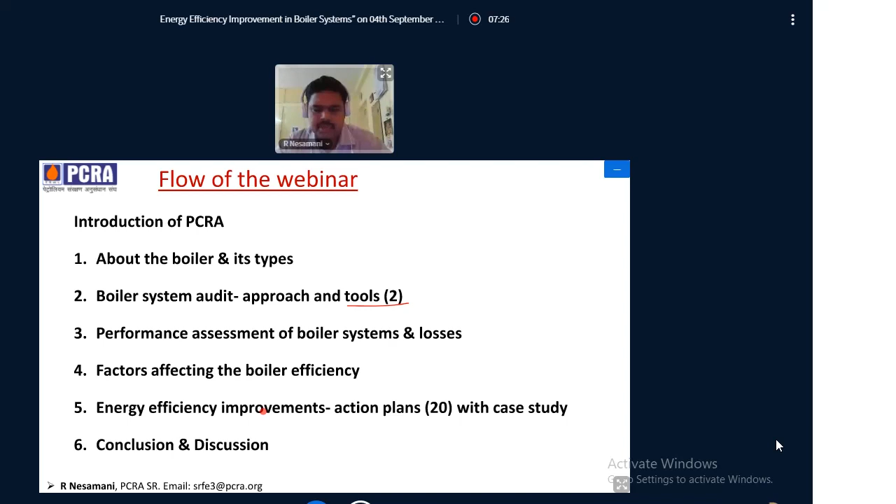Introduction about PCRA: our vision is to become a center of excellence for energy conservation. Actions towards achieving our vision include conducting trainings for industries on energy conservation techniques, and conducting energy audits for industries at all levels, starting from PAT audits for designated consumers to MSME audits. We have conducted more than 10,000 energy audits till date.

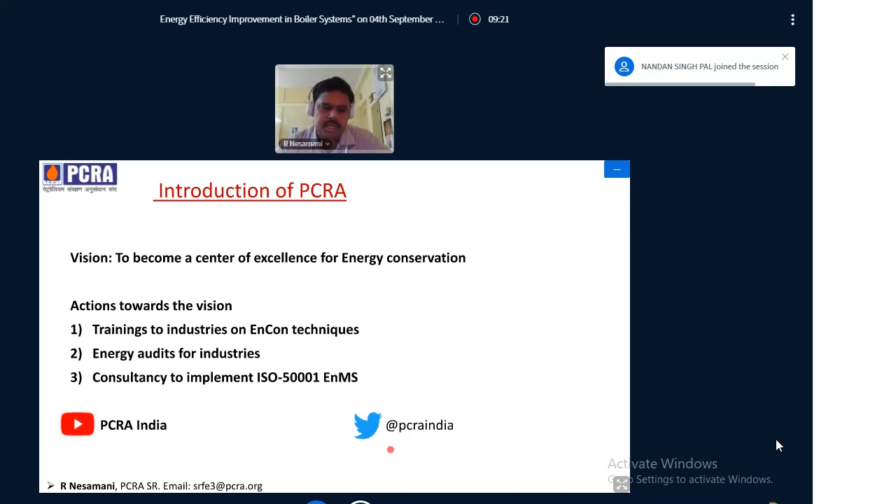We provide consultancy to implement energy management system ISO 50001 for industries to keep continual improvement in energy performance. This is our YouTube link for PCRA India, and this is our Twitter handle. If you follow our YouTube and Twitter, you will continuously get updates about energy conservation.

So first, we'll move on to a small introduction about the boiler. A boiler is a pressurized vessel which converts water into steam using heat energy by burning a fuel. We give fuel and air through a burner, and because of its combustion, it produces heat energy. That heat energy is absorbed by the water, and the water gets converted into steam. This is a simple and brief introduction about the boiler.

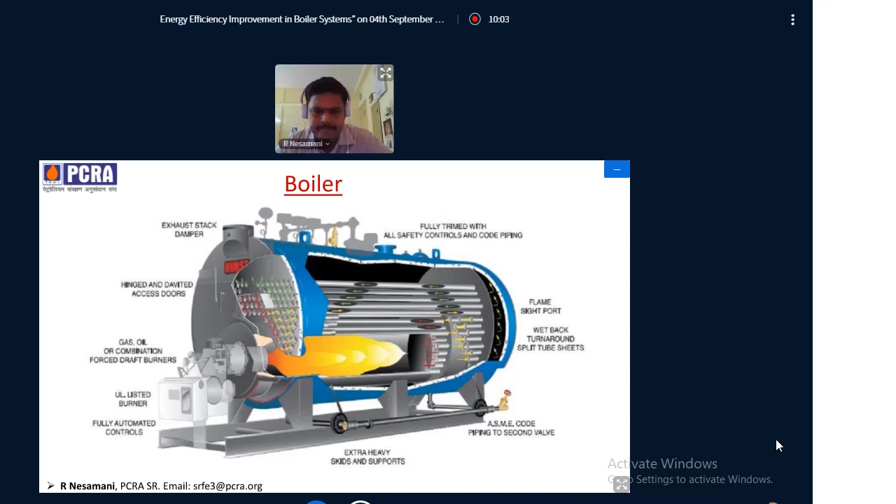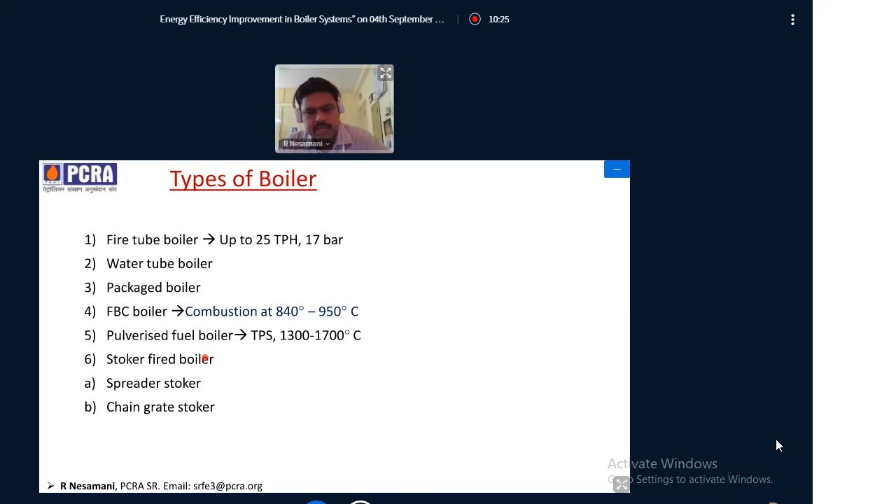Types of boiler: we have various types of boiler as per its pressure and applications. We have many types like fire tube boiler and water tube boiler, packaged boiler, FBC, and pulverized fuel boiler, which is mostly used in thermal power plants at high temperatures. And stoker fired boiler has two types: spreader stoker and chain grate stoker.

So the second topic is how to do an energy audit of a boiler system. What is the approach, and what are the tools we will be using during the audit?

The audit approach is like this: first thing, if you go to any industry, we have to calculate the thermal baseline for the plant or industry, meaning in terms of specific energy consumption - how much thermal energy they are using to produce one metric ton of the product output. That we have to calculate and find, so that will be our baseline specific energy consumption.

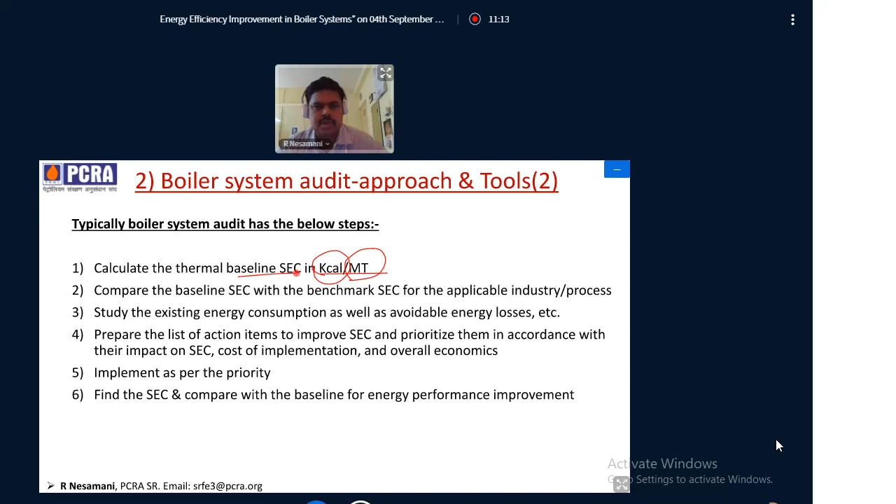After that, we have to compare that baseline with the benchmark baseline for the applicable industry or process wise. For example, let's take a rice mill - there may be some 1,000 kilocalories per metric ton of rice product. So we have to compare that with other industries, so we can know what is our status, whether we are lagging or if there is any scope of improvement. That we have to find out.

Third, we have to study the existing energy consumption pattern, to find the avoidable energy losses in the boiler and steam systems. Fourth, as per the findings, we have to list down the action plans to improve the SEC.

We have to prioritize them as per the impact on SEC and the cost of implementation, economics, and overall economics also, with the payback period. As per the priority and economics, we have to implement the action plans one by one.

The final step is, after implementing, surely the specific energy consumption will come down. So we have to find SEC again and compare with the initial baseline, so that will show how much improvement we have achieved in energy performance. So this is the approach we will be using for energy audit of a thermal system.

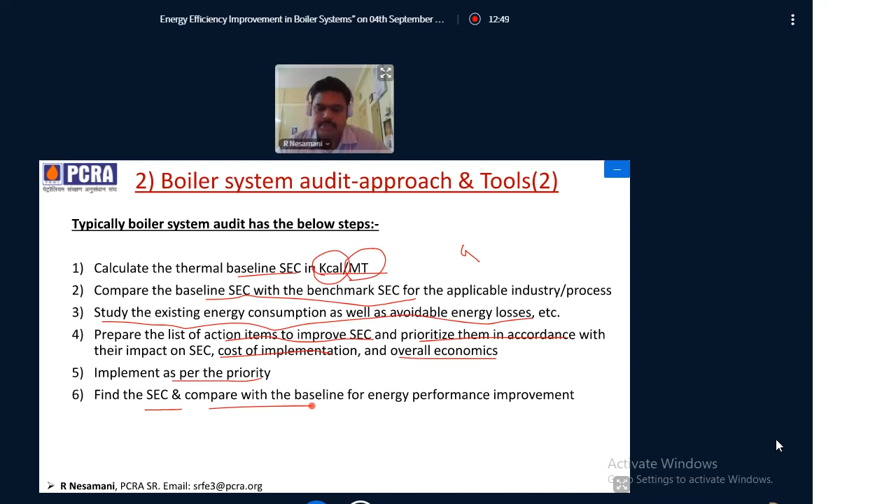So for tools, I have told that we will be using two tools. One is a steam balance diagram. Whenever we go to any industry for a boiler and steam system audit, we have to draw a single line diagram of the steam, showing how the steam flows through various processes, and what are the pressures and temperatures. This will give a fair idea about which process consumes more energy.

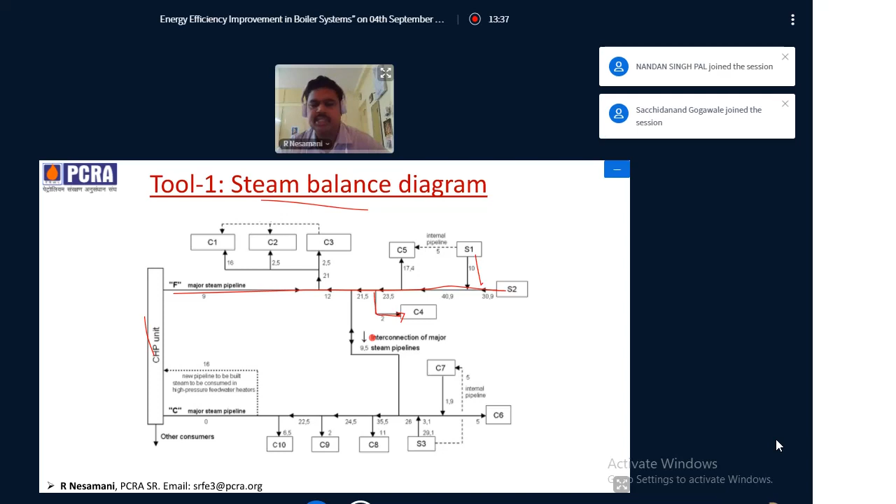Meaning, the required temperature and pressure may be lesser, but we may be supplying steam at high pressure and temperature. Those things, and leakages - those things we can approximately find out.

The second tool is analyzing the energy basket of the unit. Whenever we go to an industry, we have to find what are the various energy forms they are using. One is the electricity they will be using - and this example is from a rice mill cluster - they have been using rice husk for boiler fuel, and the third is diesel.

When we asked the industry person what is your energy consumption, she just replied that we have been consuming electricity of this much units per month, and asked us to do something so our energy bill reduces. So the point to note is that most small industries think thermal energy is not important, or significant, as it is not metered in small units. They are not aware that it's also one of the energy forms they are consuming, and losing.

So when we prepared an energy mix basket for the rice mill, we found that the electricity which they consider their main energy consumption is only 6.5% of the total energy consumption. The rice husk, meaning boiler fuel, consumption is almost 93%, but electricity consumption is only 6.5% of the total energy mix per year.

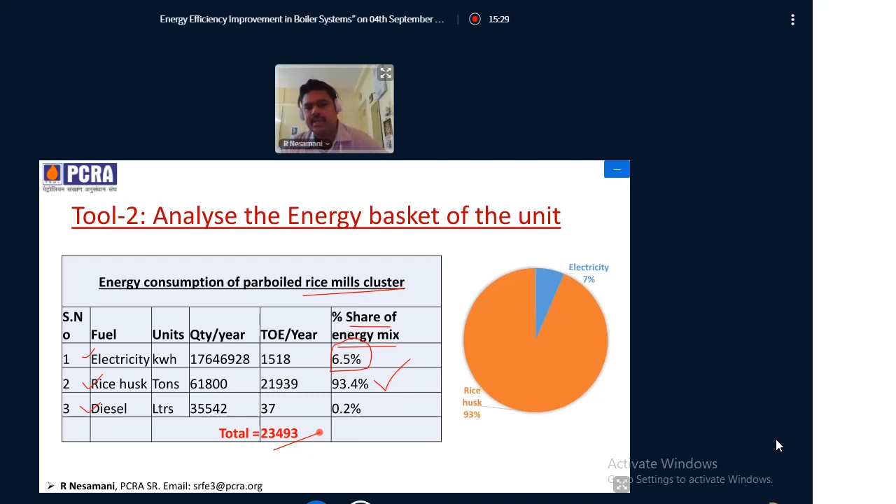So this shows the importance of giving priority to the reduction of thermal energy instead of focusing only on electrical energy. That's what needs to be noted.

So next is the energy balance diagram of the boiler. If fuel energy input is in the form of fuel, maybe rice husk, coal, wood, anything, it is 100%. It enters the boiler. The boiler will have losses, like dry flue gas loss will be maximum, then radiation and convection loss and the blow down loss. These losses will be there. After that, the boiler efficiency will come between 70 to 80%.

This 80% of input energy is given in the form of steam. That is the output of the boiler. That steam enters the end use, for process usage. During that usage also, we lose steam in the form of distribution system, which we will discuss in detail. Almost 5 to 15% is lost in distribution. So finally, the end use load will get only 56 to 75%.

The energy manager of the plant, his main concern shall be to improve the overall efficiency so that the fuel cost, consumption cost should come down, and specific energy consumption should come down.

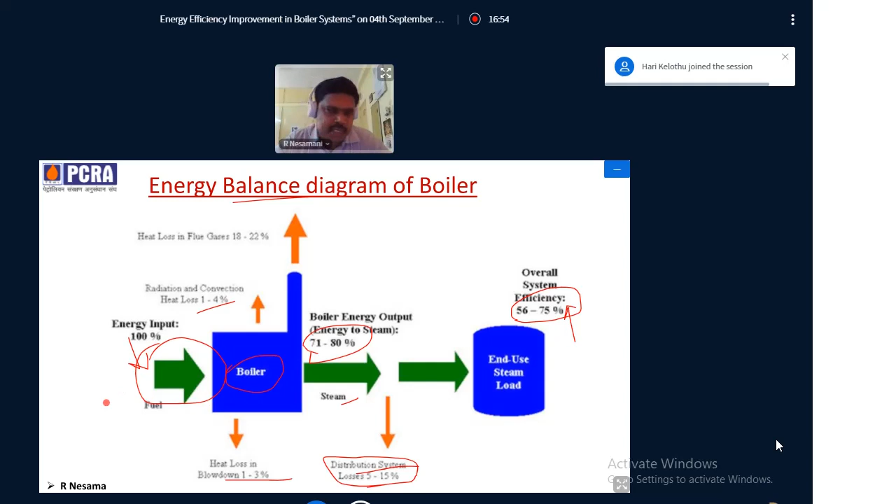So this is the boiler's combustion chemistry. What happens inside the boiler? We supply fuel and air inside the furnace using a burner, and both mix together because of 3 T's. We need 3 T's: time, turbulence, and temperature.

Because of the combustion process, the byproduct is wasted as flue gas. It comes out as CO2, nitrogen, water vapor, oxygen, and carbon monoxide. It shall be in very little amount, but anyway it will come out. And some fuel will be lost as unburned.

So two important reactions are happening. One is carbon combined with oxygen to form carbon monoxide, if there is a lack of oxygen, which releases only about 4000 BTU per pound of energy. If it is proper combustion, carbon mixes with oxygen to form CO2, releasing energy of 14,000 BTU. So you see that because of lack of combustion, we lose almost 10,000 BTU per pound of fuel.

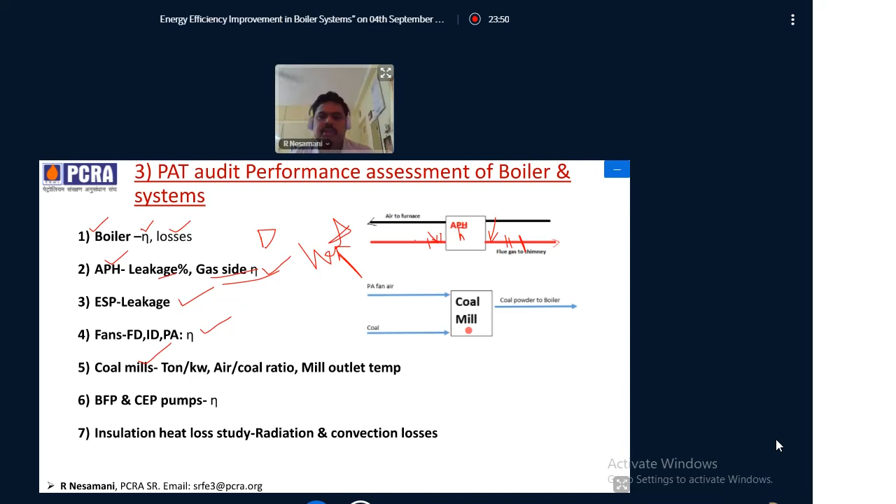Fifth is coal mill. For coal mills, we have to find - this is a coal mill. Air is supplied to coal mill to carry the coal powder. The coal is supplied to coal mill, crushed in the coal mill so that the coal powder goes to the boiler. This is the process of coal mill. What we have to find is how much ton per unit of energy consumption, that we have to find out.

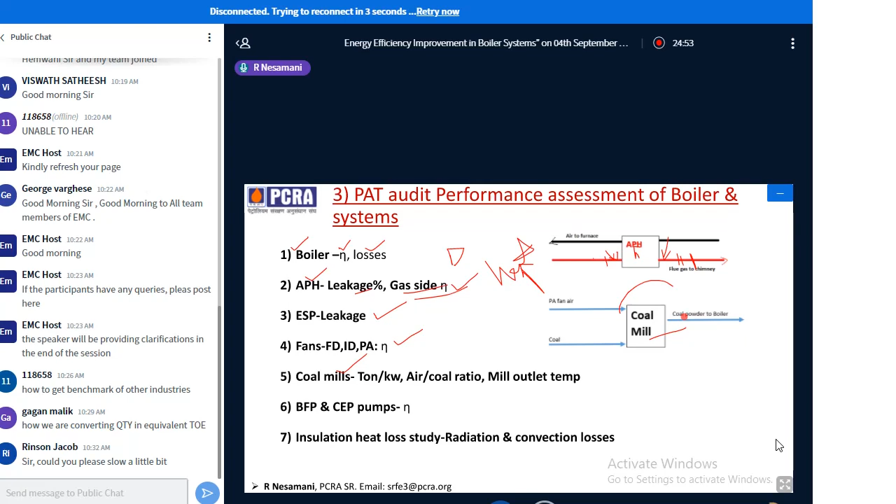Direct method is output divided by input. Input is given in the form of fuel, so mass flow rate multiplied by GCV will give input to the boiler. And the output is steam - steam's enthalpy minus enthalpy of the feed water will give the output. So this will give the efficiency of the boiler unit.

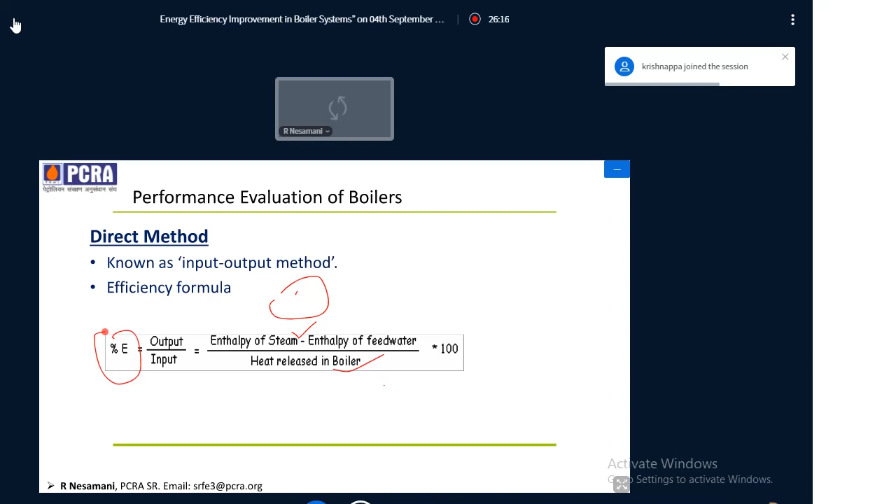But the problem with this method is even a small error in any measurement will end up with a high deviation in efficiency calculation. Because of that, we don't use this direct method. We normally use, as per the standard PTC 4.0, it is mandated to use an indirect method, that is a heat loss method. We'll see that.

This is for a boiler, fuel and air given as input, and flue gas going out to chimney. What are the losses? One is dry flue gas loss, and hydrogen loss, moisture in fuel loss, and moisture in air loss. This is because hydrogen combines with oxygen to form water. That water, as well as the moisture in fuel and moisture in air, will get heat of combustion from inside the boiler and get converted to water vapor, so it consumes energy from the furnace, absorbing energy and wasting useful heat.

And the fifth loss is carbon monoxide loss. This is because of the lack of oxygen.

Seventh is fly ash loss and bottom ash loss - this is applicable for coal boilers. And surface loss, this is due to the skin temperature, boiler skin temperature, as well as insulation. And this is blow down loss - this also will be there for boilers.

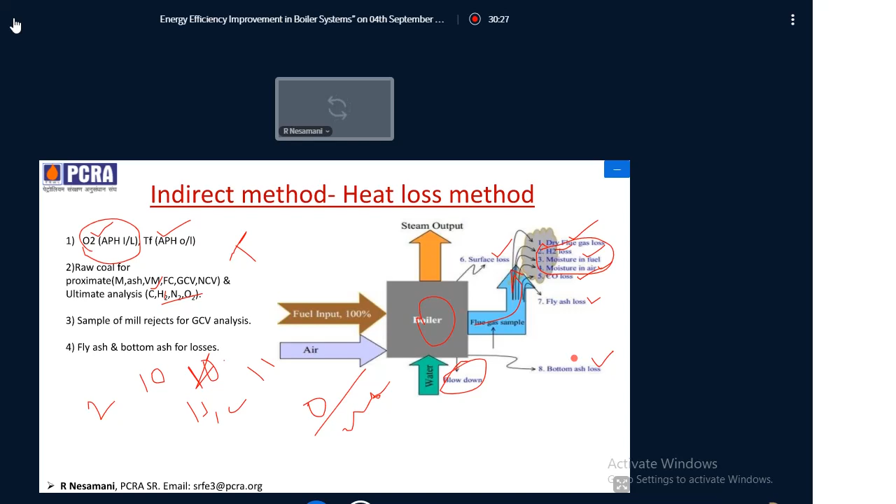These are the fly ash and bottom ash losses. We have to collect the sample and measure the GCV. Thereby we will find how much energy is lost in ash.

So one point of concern is, in flue gases, which data need to be taken, oxygen or CO2? Using CO2 also you can find the excess air, but it is preferable to take an oxygen reading. The reason is flue gas contains oxygen, CO2, carbon monoxide at very ppm level, and SO2. But if you see the correlation between oxygen and excess air, as the excess air increases, oxygen also increases proportionally.

But in case of CO2, as excess air increases, the CO2 reduces, not exactly proportionally, there's a little deviation. For example, for LDO, if excess air is increased from 2 to 10%, it causes O2 in flue gas to increase by a factor of 5, but the CO2 drops by only 10%. Because of that, it is preferable to use an O2 reading for finding excess air.

Also, oxygen percentage is less sensitive to variations in the chemical compounds of the fuel. But CO2 in the flue gases depends on the carbon percentage in the fuel, whereas O2 is not affected by the carbon content in the fuel. Because of these reasons, we prefer to take an oxygen reading to find the excess air.

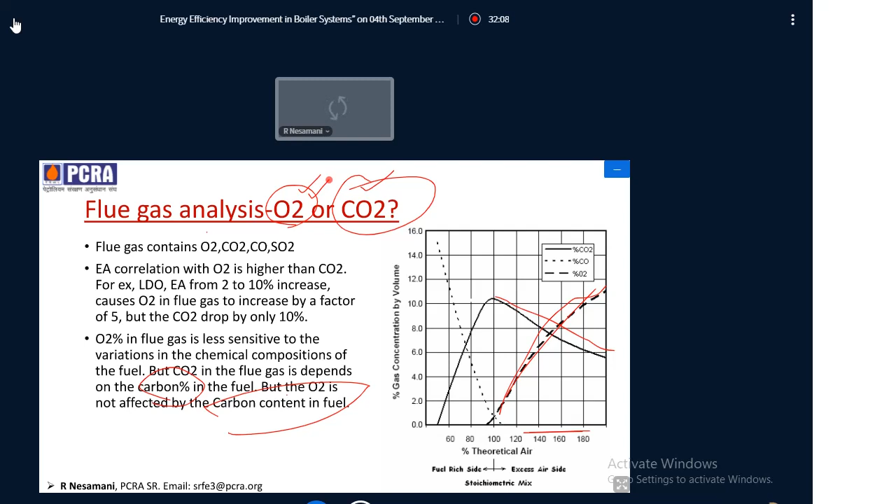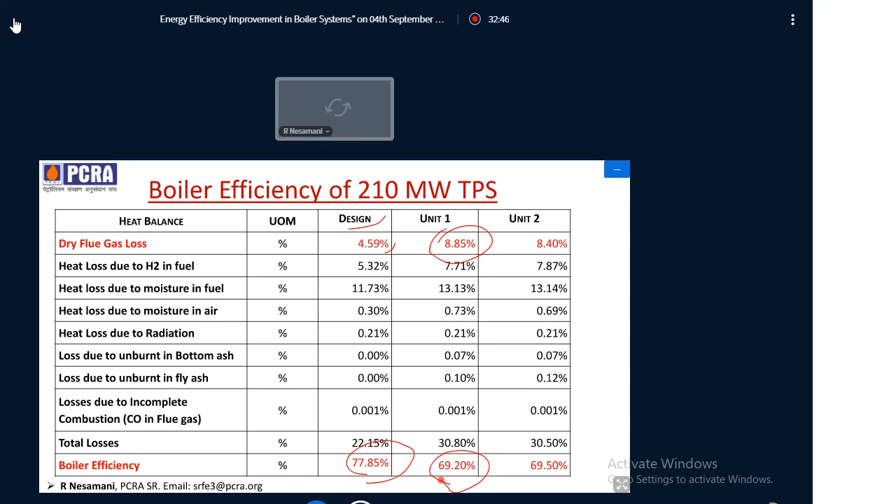So we'll discuss the losses in detail. The first loss is the dry flue gas loss. The causes are high excess air and high flue gas temperature, meaning stack temperature.

First we have to find the theoretical air, that is the stoichiometric air. For example, for coal, 10.7 kg of air is required per 1 kg of fuel. It will vary as per the various types of coal, depending on the carbon and hydrogen content in the coal. But even if you supply this optimum air, is it enough?

No, it's not enough, because inside the furnace complete combustion cannot happen that way — each carbon particle will not mix exactly with an oxygen particle. So we need to supply a little bit of excess air so that complete combustion takes place.

So we have to find the optimum excess air levels for each fuel. For example, for coal, optimum excess air is 15 to 20%. So it means that if you supply almost 12 kg of air per 1 kg of fuel, it will result in very good combustion. So you see this drawing which we have discussed.

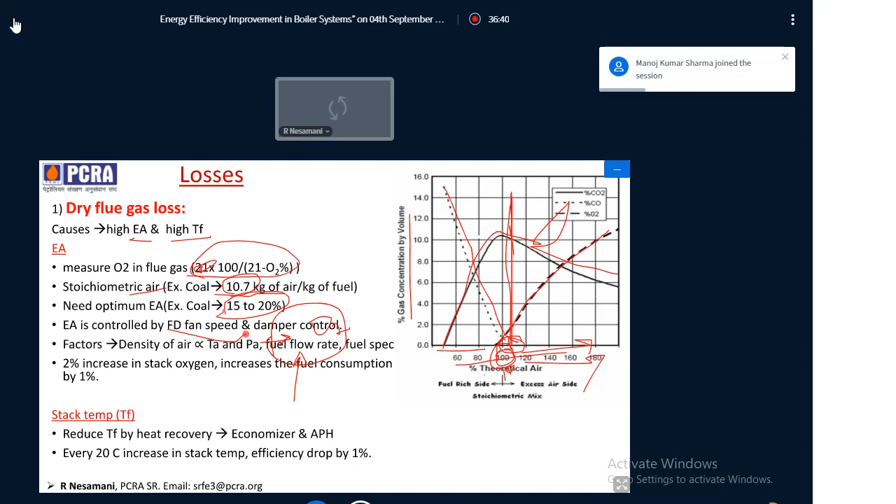If the excess air levels increase, it will carry temperature away from the combustion and exit to the chimney, wasting it. That is the biggest loss that happens in any boiler. So the control mechanism is by the FD fan. We can use the FD fan speed as well as damper control, for small boilers I'm talking about.

But this is called boiler tuning - what we do is put a flue gas analyzer at the exit. We observe the O2 level. We have to use the damper, adjusting it so that the excess air levels are reduced, meaning O2 in the flue gas analyzer shows around 2%, like that. At that point, we fix the damper position. But if we do that manually, is it enough?

If you see, the factors which affect excess air include air density, and temperature of air is indirectly proportional to density. If the temperature of air increases, the density will reduce. If we do the boiler tuning at 6 AM in the morning, what happens in the evening? Temperature will increase, the density will come down, so the air flow will come down. So it will go into the lack-of-combustion zone. This will have a big effect on boiler efficiency.

Other factors like fuel flow rate and fuel specification will also affect this, because if the fuel flow rate varies, we need to supply more or less air. Fuel specification also affects the excess air requirements. If you see, a 2% increase in stack oxygen increases fuel consumption by 1%. So we have to be very careful in finding and setting the excess air.

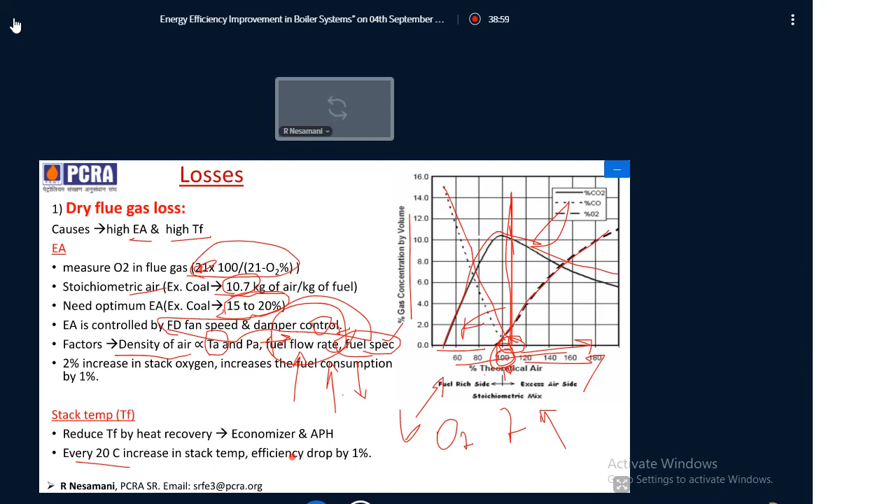So the second reason for dry flue gas loss is stack temperature. If you reduce the stack temperature using heat recovery options like an economizer and APH, the efficiency of the system will increase. We will see in detail how every 20 degrees Celsius increase in stack temperature will drop the efficiency by 1%.

This is a case study example from a PAT audit of TPS. They have 4 units. If you see, the stack temperature was very high, 183 degrees Celsius, but in fact the design temperature was only 140. This caused a loss of almost 13.24 crores. If they optimize the stack temperature, they can achieve this much in savings.

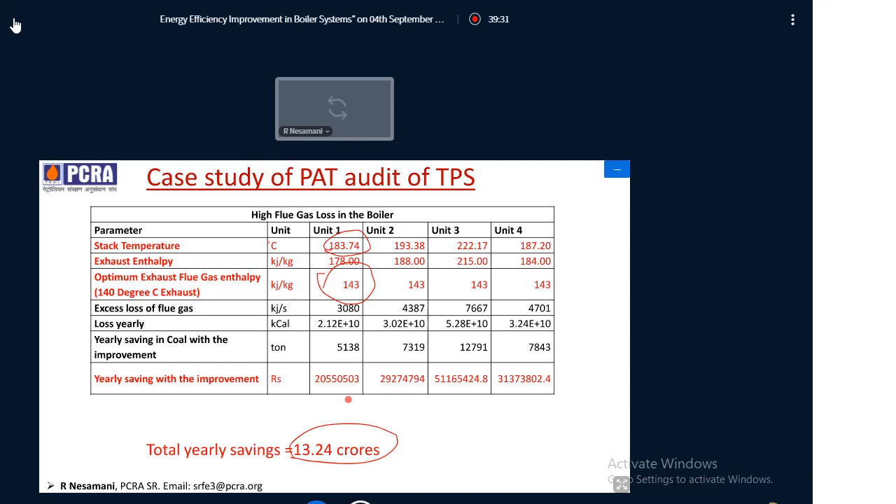Second is hydrogen loss, or enthalpy loss. What are the causes? One is hydrogen in fuel, moisture in fuel, and moisture in the supplied air. Hydrogen in fuel will mix with oxygen to form water, as we discussed. That water and these moistures will take heat of combustion to form steam. So that is a loss.

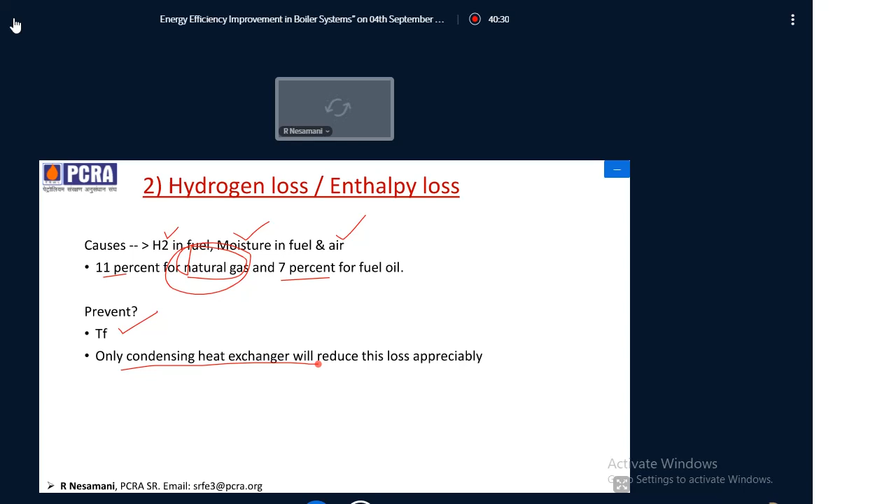Hydrogen is very high in natural gas, so normally this loss is very high if we are using natural gas as fuel - almost 11% for natural gas and 7% for fuel oil. So how do we prevent this loss? We can control the flue gas temperature, but it will have very little effect on this loss. Another method is using a condensing heat exchanger, that is, a condensing economizer, which can reduce this loss appreciably.

Third is unburnt loss. That is because of lack of combustion, lack of oxygen - carbon mixes with oxygen to form carbon monoxide, which releases lesser energy than the actual energy. The reasons are high primary air flow, fuel size can also be a reason for carbon monoxide, and low air supply.

The combustion needs 3 T's: time, turbulence, and temperature. Enough time in the furnace shall be given to the fuel to burn completely. Second is enough turbulence so that mixing happens properly. And enough temperature shall be available inside the furnace for proper combustion. Most of the time, because of lack of time, carbon monoxide formation happens.

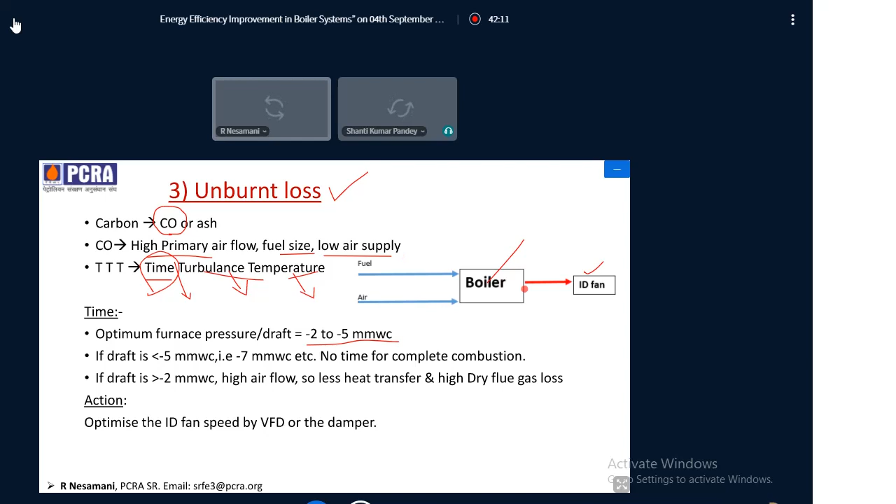For example, fuel and air enter the boiler and exit through the ID fan. The ID fan's job is to maintain draft, meaning pressure inside the furnace. The optimum draft is -2 to -5 mm of water column. If the draft is very low, meaning the pressure is lower than this optimum level, it means the ID fan is at very high speed, pulling the flue gas very fast. So the time given for complete combustion of fuel is reduced, causing formation of carbon monoxide.

If the draft is very high, if the ID fan is rotating very slow, what happens? A high airflow will be there, causing excess air, so heat transfer will be low, and dry flue gas loss will increase. So it should be neither high nor low - we have to maintain the optimum furnace draft.

What do we have to do? We have to have a pressure gauge in the furnace. The operator shall continuously monitor the pressure gauge and adjust the ID fan. If the ID fan has a VFD, it is very well, otherwise damper control also can be done so that the draft is maintained.

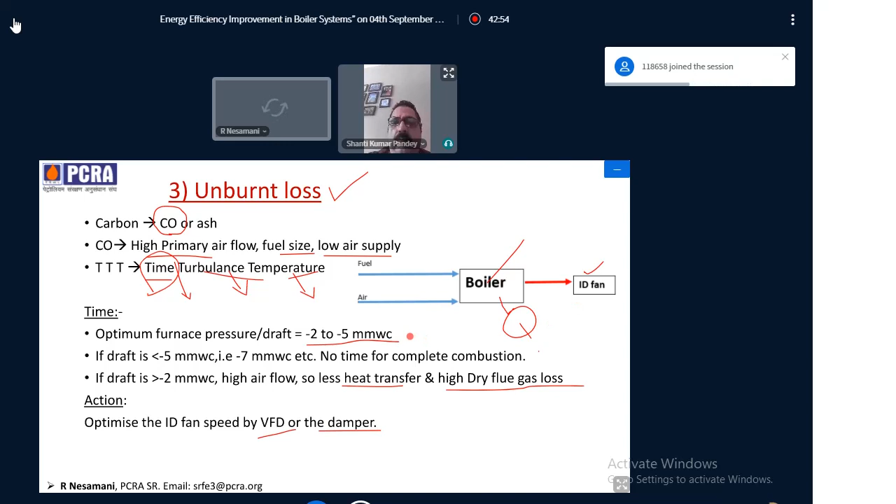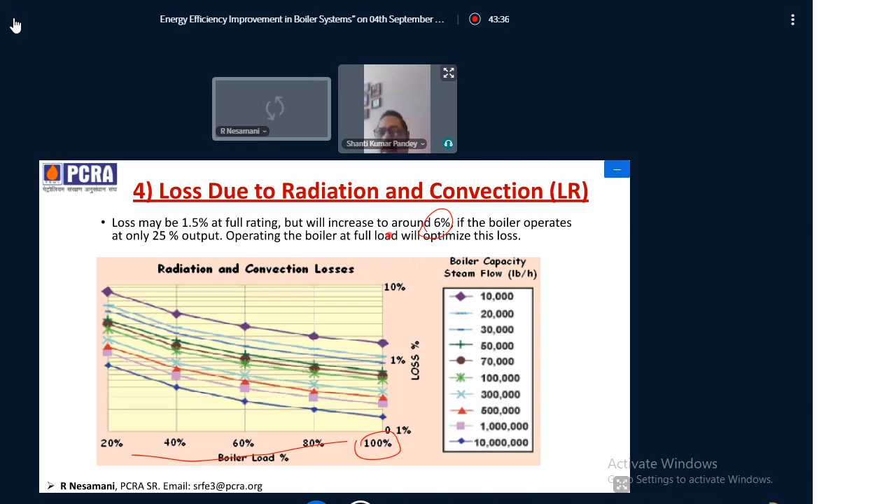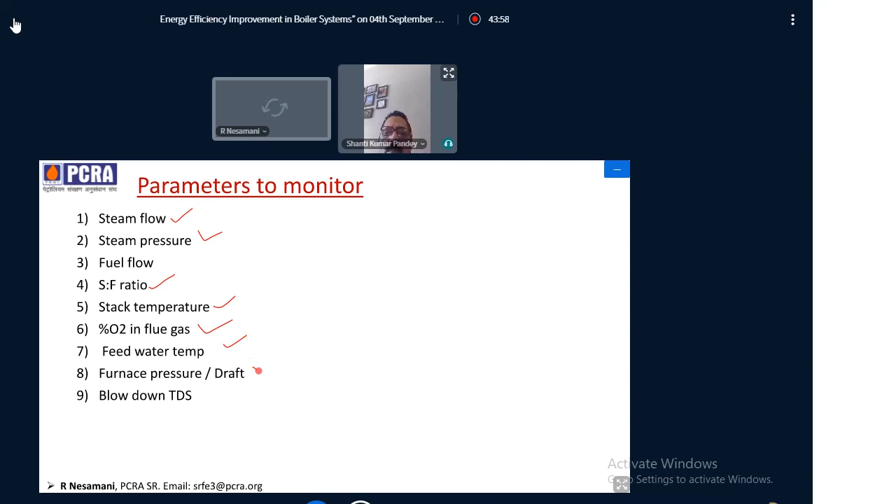So what are the parameters to monitor while operating for boiler efficiency? One is steam flow, steam pressure, fuel flow, and evaporation ratio, stack temperature, oxygen in flue gas, feed water temperature, furnace draft, and the blow down TDS.

Fourth is factors affecting boiler efficiency. One is stack temperature. If the stack temperature increases, the efficiency will go down, because it carries away the useful heat from the furnace.

Second point we have to decide is whether the efficiency calculations are as per GCV or NCV of the fuel, because that we have to finalize. We normally have to find out what was used in the PG test, whether GCV or NCV, and accordingly use the same thing. Otherwise there will be deviation in the efficiency, which will confuse us again.

Third is fuel specification. Initially, when commissioning the boiler, they found the fuel specification was this much, and as per that they set the excess air levels, theoretical air requirement, and excess air level. But is this enough? If you see, it is not enough, because if the hydrogen increases, the loss will increase. So the hydrogen to carbon ratio shall be lesser, so that efficiency improves.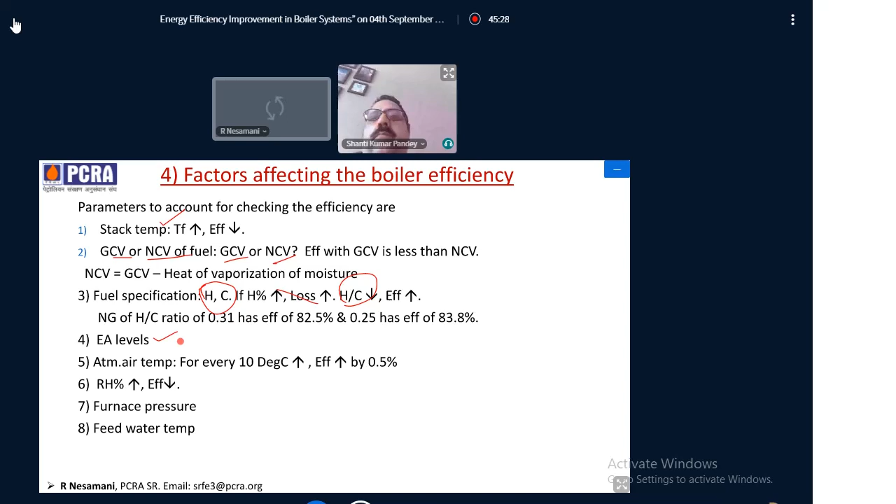And the fourth point is the excess air levels - that is very important for limiting the dry flue gas loss. And atmospheric air temperature: for every 10 degrees Celsius increase, the efficiency will increase by 0.5%. This is because the hot air entering means the amount of heat to be given by the fuel is reducing. And the sixth point is relative humidity.

If relative humidity of the air increases, the efficiency will come down, because in rainy seasons your efficiency will come down, as the air will have moisture content. That moisture enters the boiler, consuming useful heat, so efficiency comes down. And draft furnace pressure we have discussed. Eighth point is the feed water temperature.

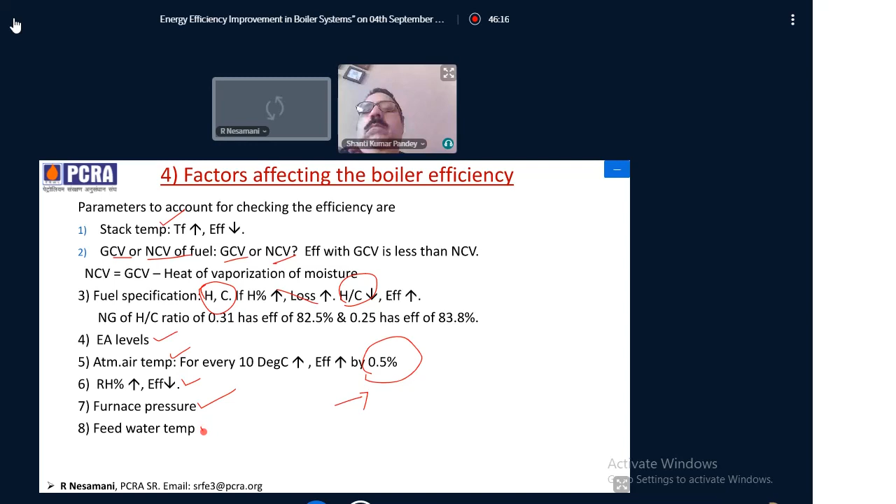Now we will discuss the question and answer.